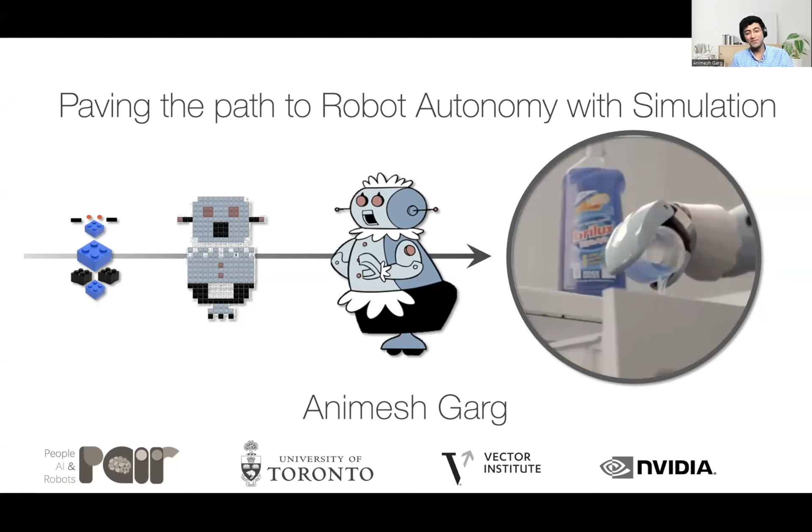Thank you very much. Thank you for the patience of all the in-person audience to accommodate all of the people who are remote. I am not, unfortunately, at ICRA, but it feels that the workshop has been a wonderful turnout of talks and posters, and overall the conference has been wonderful. So I'm having real FOMO here. For everyone else who joined us now, I'm Animesh.

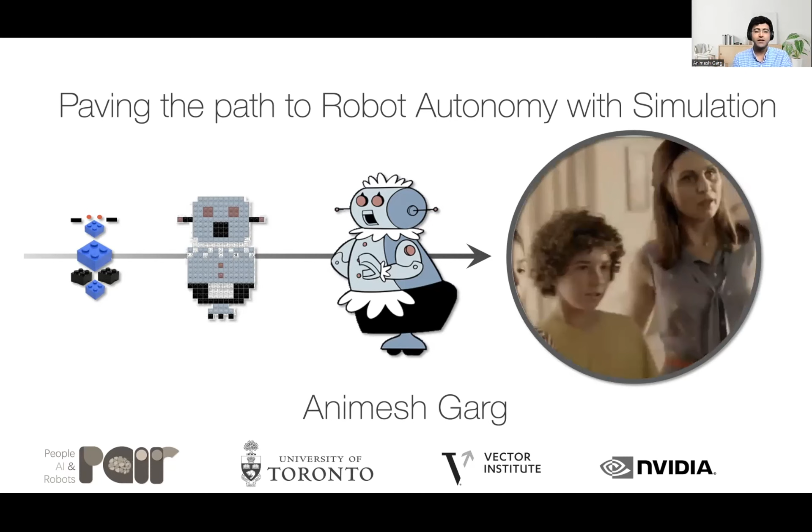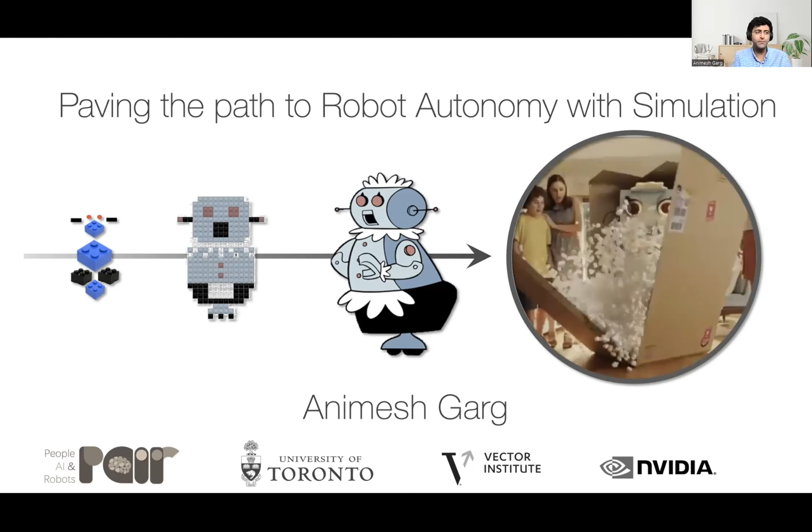I'm currently a faculty at U of T, and I split my time between NVIDIA. Most of the things that I work on are thinking about how we can build learning-based robot manipulators, and more recently, learning-based robot mobile manipulators. So what I'm going to talk about today is the problems that I'm working on in enabling robot learning at scale.

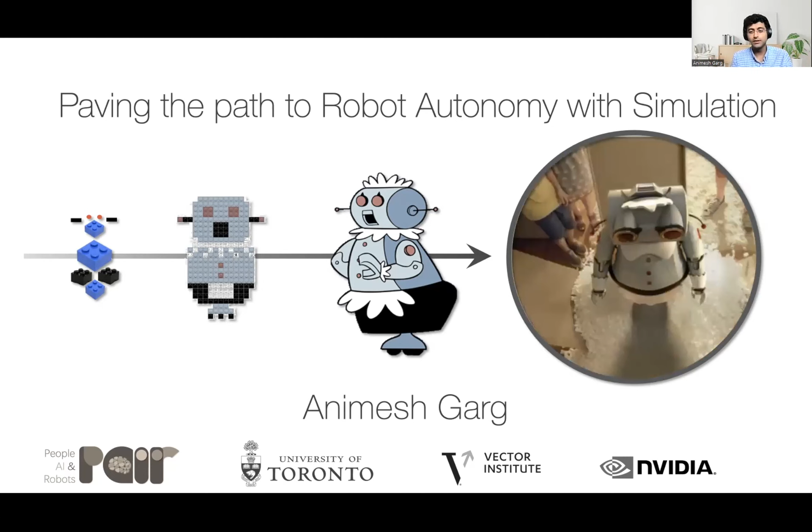Let's get started with the big picture idea. Let's start thinking about learning, particularly as a beginning problem. Learning of late in the last few years, you could argue, has been powered by three main components: large-scale structured models, data, and compute. This has essentially resulted in increasingly high performance, whether it's in computer vision or language.

Now, if you really look at these ingredients of modern machine learning - models, data, and compute - they don't really work for robotics, in a sense. We don't have the same scale of models. We definitely don't have the same scale of data sets. And we are really not using cloud computing for either training or inference at the same scale as, let's say, people using transformers for language models.

Now, one could argue, how do we build robot solutions? One solution mechanism can be: we build in domain expertise, one problem, one solution. A lot of these solutions would be structured, where we build in domain knowledge. The other aspect can be: let's go all data on it, just add data, and hopefully an end-to-end mechanism would work. Well, practically, neither of them are sufficient.

You could argue that neither achieves generality at scale. On one hand, you would have basically the interplay of performance versus flexibility. On the other hand, assuming the data-only approach were to work, where is this data going to come from, and how is this going to generalize?

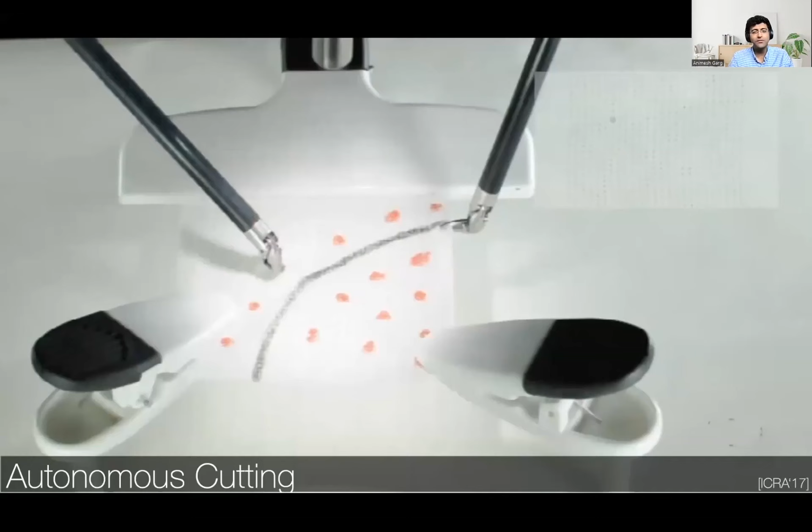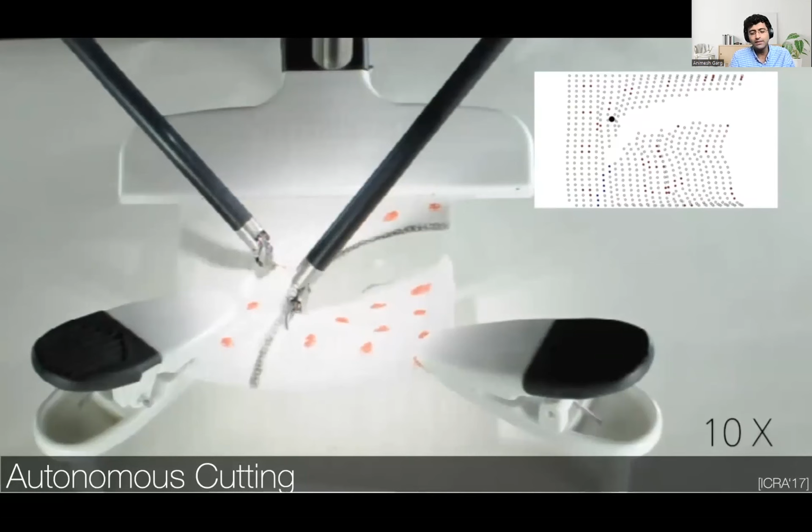The simulator itself is not some finite element model. It's actually just a single Python file, surprisingly. And we were able to train an RL policy on that simple simulator and put it on the real world robot. And surprisingly, it worked. That was my first foray in putting sim to real. At the time, I was very surprised that it did anything at all, given the simplicity of the simulator, which piqued this interest in me: what would it take, or when would this transfer work?

When would this transfer not work? How much simulation, or how much transfer, how correct does the simulation need to be? And how much randomization would we need for any of this model to work?

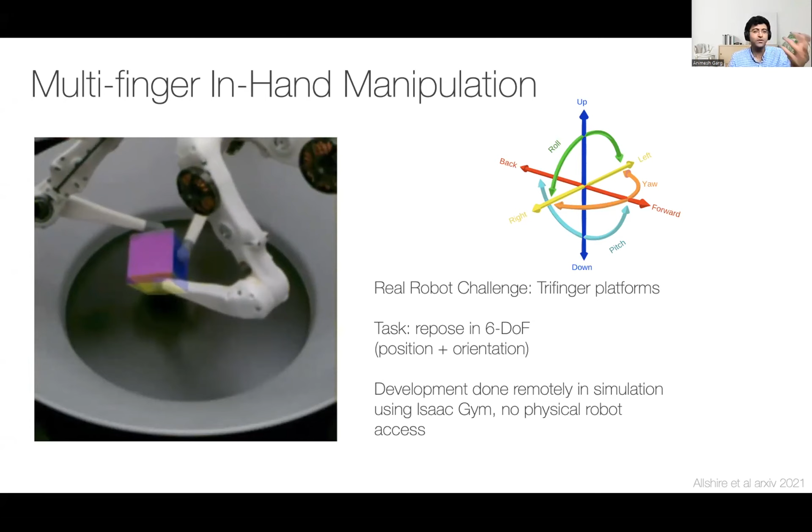So cut to sort of 2021, we started working on a slightly harder problem of in-hand manipulation. And this time around, the problem was that the robot is actually not with us. We don't actually have access to the robot. The robot is remotely operated. It is available as a service. This was a challenge run by folks at MPI, called the Real Robot Challenge, where you had access to the system purely through an API, but not the real robot. So you cannot really tune it. You can only use the robot in a limited amount of capacity.

So then what we said was, okay, how do we train such a model in that case? People had shown that you could do sim to real training for a shadow hand. OpenAI had done that in 2018, 2019, but that process was very compute intensive, to a point where it was not really replicable, at least not in academia, in a sense.

So with a combination of fast simulation, I would say courtesy of Isaac Gym at NVIDIA, we started building RL-based pipelines for training an in-hand manipulation model. In this case, because we were not using explicit poses, we started using the ability to track key points as state representations for objects in hand. And we were able to train essentially an RL policy that would be goal conditioned. So you can grab the cube and put it in an arbitrary goal configuration without coding in any strategies.

So we are not coding in particular strategies of gaiting or finger manipulation. And all of this was actually done purely on a desktop, in about 1 day of training, which was basically, again, the fact that simulators were running fast enough that we could train an online, on-policy RL algorithm, in this case a PPO, to be able to achieve that.

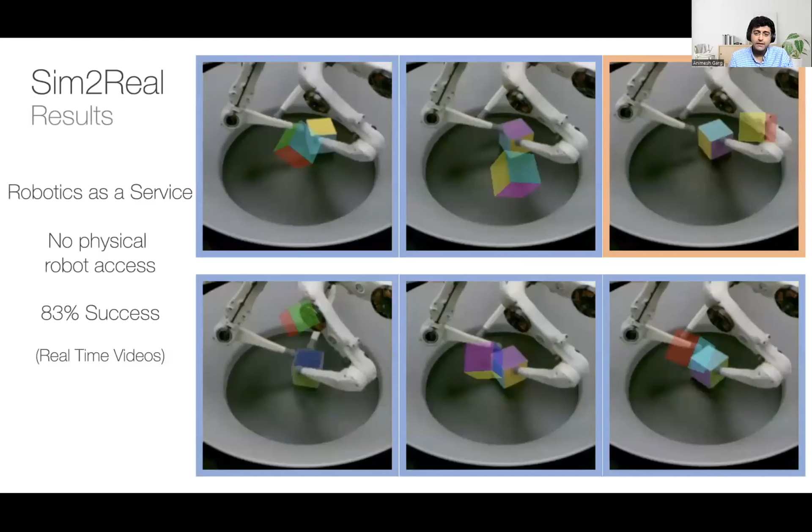We were able to show that with a sufficient amount of domain randomization, with correctly chosen parameters in randomization, we were able to transfer this policy, which was succeeding 90+% in simulation, directly to a robot. During evaluation, we found the policy would work 5 out of 6 times, which was surprisingly good, in the sense that this was supposed to be a hard task.

We did not have access to real robots, so we were not overfitting to our real robot—we were just using our simulator. We're allowed to do whatever we want in the simulator, as long as we can ship the policy off to work on the real robot. I thought this was very interesting, because practically this is the paradigm we want to be in: deploying a policy on a robot that we don't have direct control over.

This idea of randomization was not just limited to manipulation. Another problem where we thought simulation would be useful, but might not be correct, was legged locomotion. We worked on building legged locomotion strategies with gait selection, where low-level gaits are pre-programmed with optimal controllers, and a high-level learning-based controller selects which gait to pick.

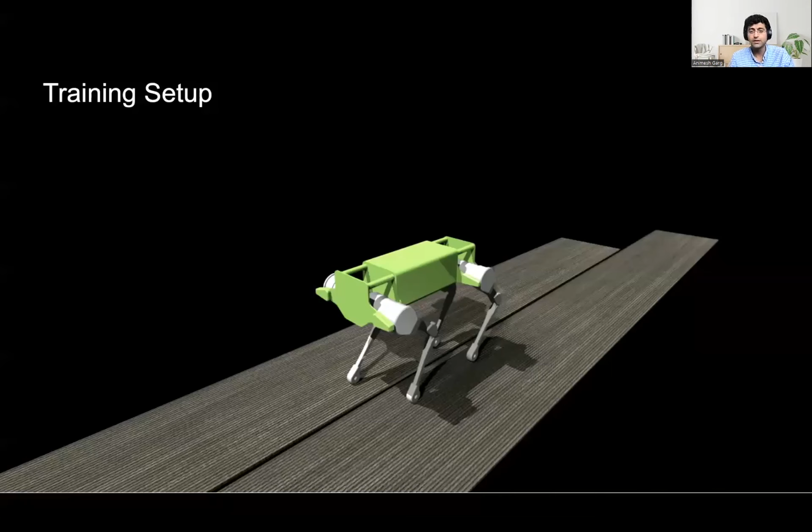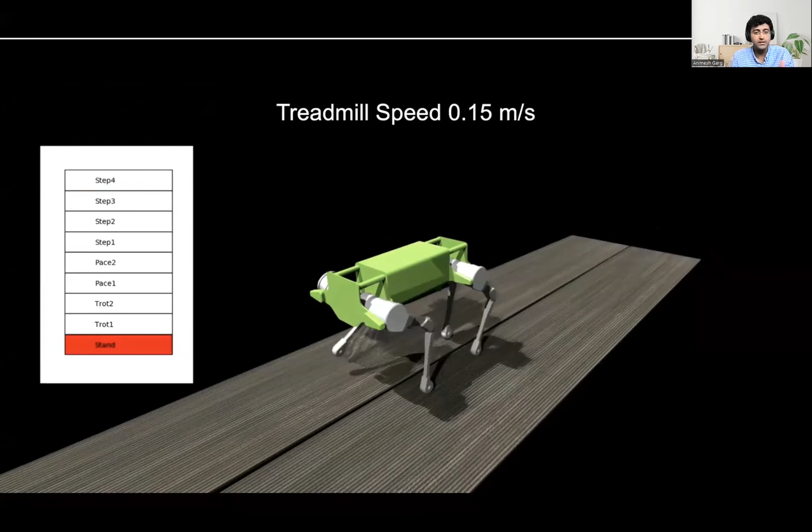This high-level controller is learned purely in simulation. This is the training setup where you can put the robot on a treadmill and ask it to do interesting things—for example, one part of the ground moving while another part isn't, or the ground moving at variable speeds rather than a fixed speed. What you see in the inset is the output of the high-level policy, switching these gaits.

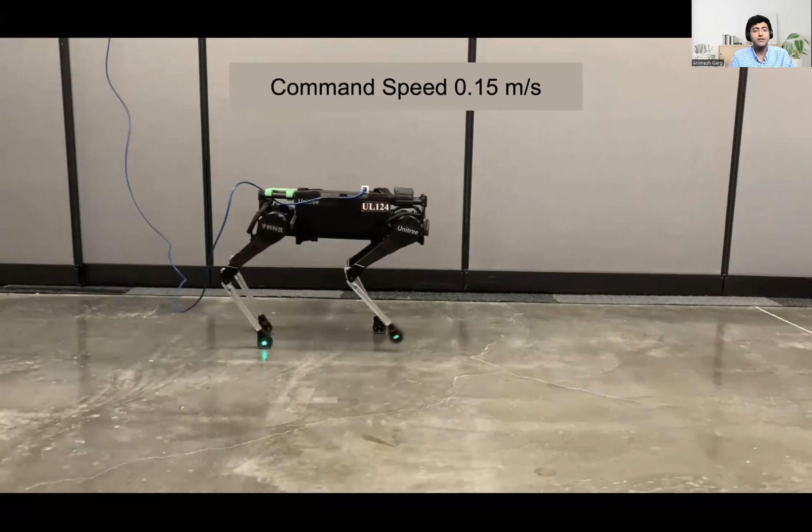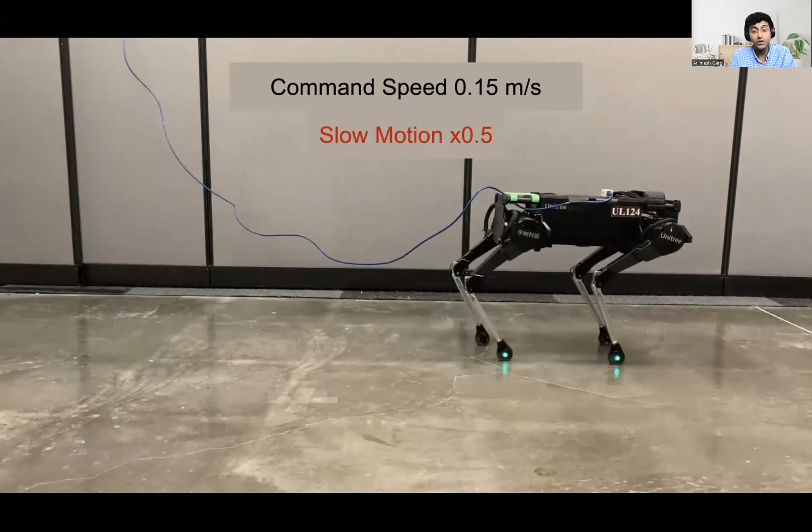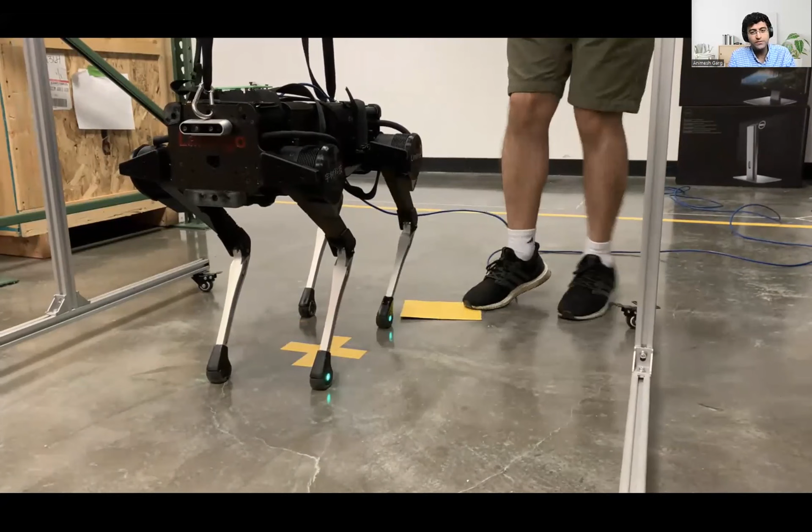This was an example where I was surprised at how little we needed to do to go to the real robot. Next, we started thinking maybe it's working because the lower level is purely an optimal controller, so all the robustness comes from that, and the high-level policy is just selecting among them. So we decided we needed to pick a better action space and train end-to-end RL policies this time, taking away the whole gating process.

This time the action space is a centroidal action space, so we learn the walking process purely with RL. The low-level component is just a QP solver, used only to compute viable ground reaction forces. Something similar and surprising happened again—we were able to train purely in simulation and take that policy onto the real robot once more.

So in two different domains—one with very heavy domain randomization, and one without a lot of domain randomization—we were able to train policies that transferred to the real robot. This led us to question the common assumption from many papers that a lot of randomization is needed, that more often than not, randomization is all you need.

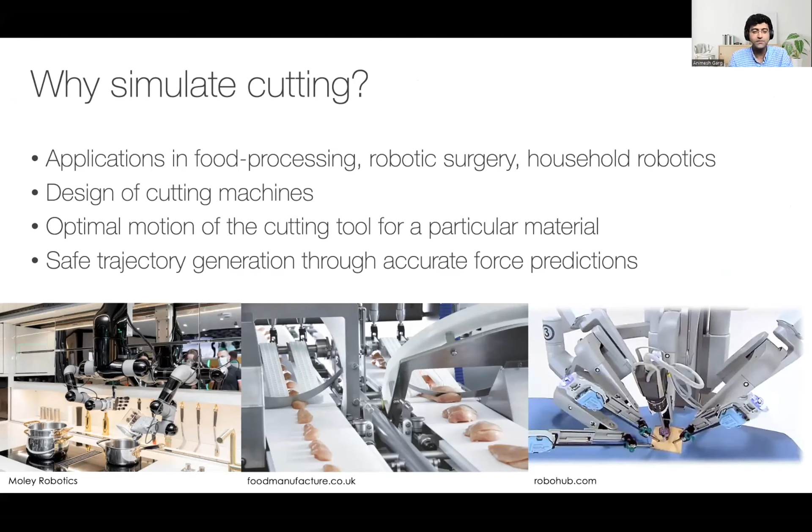Now, randomization may or may not always be possible, particularly when either simulation is slow or data collection is harder. One example of that was actually cutting. Cutting is something that is very useful as a process in a number of manipulation tasks. However, so far it has been very hard to simulate cutting because the process of cutting is fairly slow and involved. So this was a paper that we worked on last year at RSS.

We were able to simulate deformable object cutting, and we were able to make that process differentiable in simulation. So we use a detailed model of contact mechanics, which allows us to achieve realistic prediction of knife forces while maintaining the differentiability of this process.

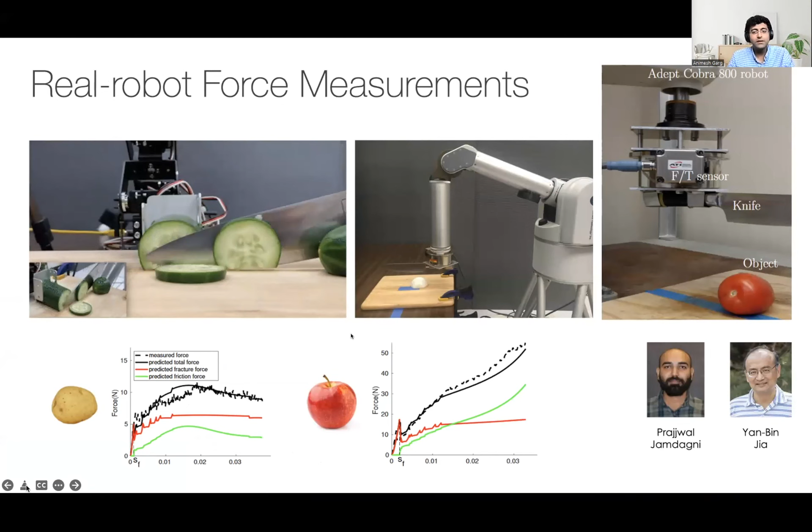We used data that was collected by others on real robots for cutting to evaluate if our simulator was indeed doing the right thing from a perspective of real cutting. So this was equivalent to calibrating the simulator parameters to a realistic setting. And because our simulation process is differentiable, we were able to match the cutting forces, and in the process derive the correct parameters for cutting.

Then we can now use this framework to create, let's say, optimal control-based cutting strategies where we performed constraint optimization, and we discovered that in this process, the gait of going back and forth for cutting emerges rather than cutting a straight through open loop, in order to minimize the forces.

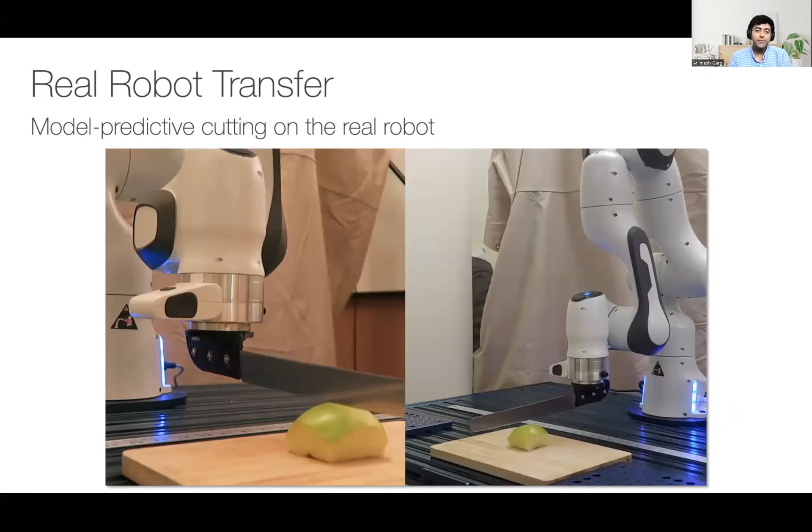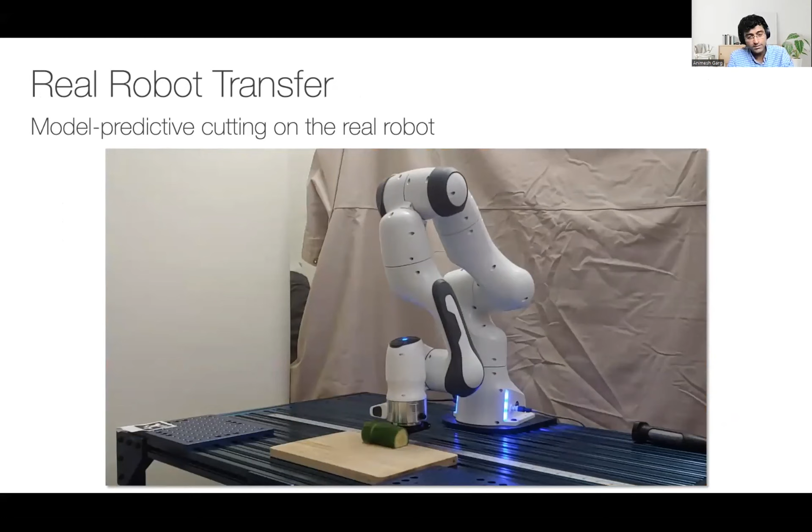And now we were able to put this process directly on the real robot. In some cases, this was done by adapting the knife and the object properties. And using that, we were able to create these continuous cuts in real systems.

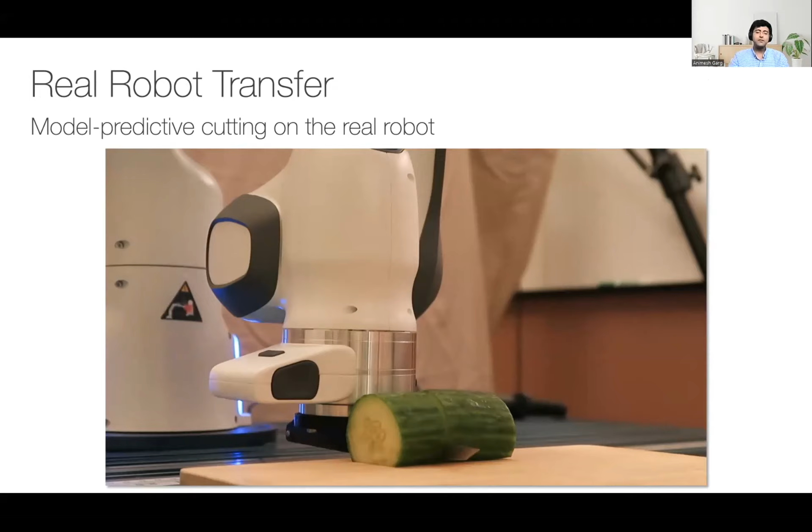So again, the takeaway in this part of the talk should really be that simulation of phenomena that are harder allows us to learn new kinds of tasks, which would be very hard directly on the real robot. However, not everything would be equally fast. In that case, online parameter estimation or Bayesian parameter estimation is going to be very useful for calibrating the simulator to the real world.

Finally, I want to talk to you about all of these simulators, which as you saw are special purpose simulators built for particular use cases. But as robot learning and machine learning researchers, often the limitation of using these frameworks is the onboarding. A student will spend 6 months building the simulator and it may or may not work. That process both slows down research and slows down the cycle time of evaluating this on the real robot.

So on that effort, we have been building what we call Orbit at NVIDIA, which is built for ease of use of simulators. We started using Orbit to interact with real-world articulated objects as a use case, particularly for large-scale articulated objects like drawers, cabinets, and cupboards.

So to generalize this, we created large-scale procedural kitchens with many object models. This is something that can be done procedurally.

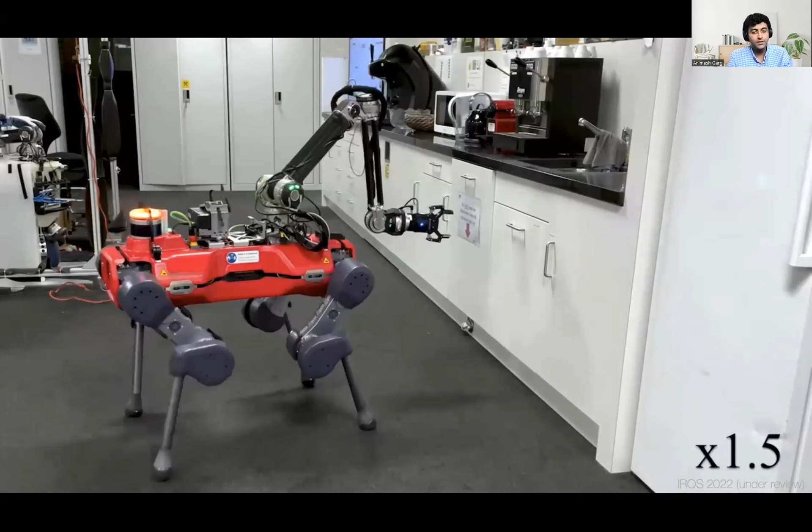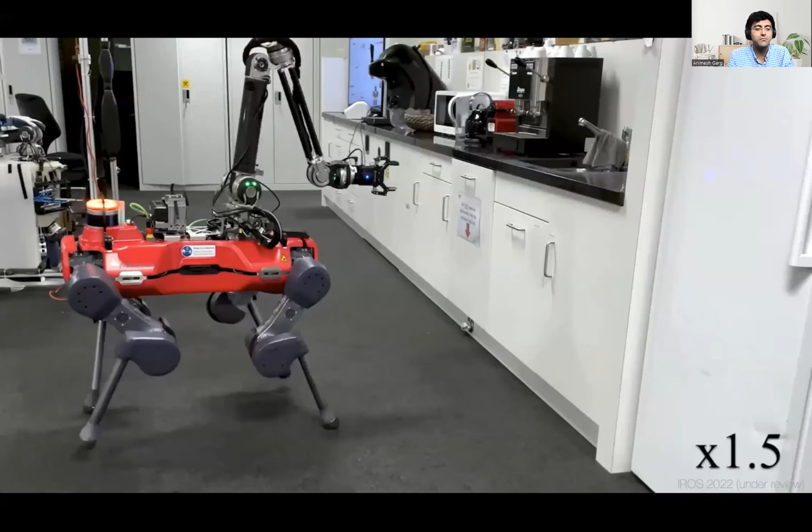This time around, we do not assume access to 3D models of objects, shelves, or doors. We are performing real-time perception on the system, and this is in collaboration with ETH Zurich, Marco Hutter's lab.

And we were also able to show that because we are using real-time perception, you can actually do dynamic collision avoidance, which is basically provided to you for free because you're solving an optimal control problem online.

So just to put this all back together, I truly believe that simulation is required for robot learning. However, we need to think about when we need robustness through simulation randomization, when we can do algorithmic system ID, and finally, all of these frameworks need to be put together along with perception to build better simulation systems so that we can do scalable learning.